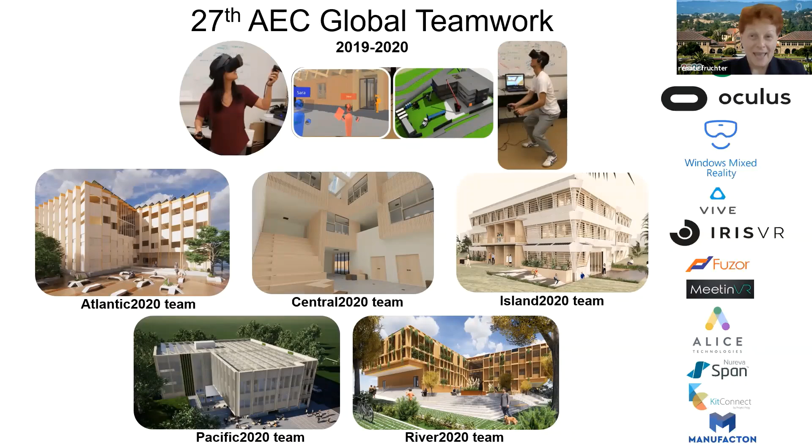And with that, let's move on to the student presentations. All right. Hi, everyone. Welcome to Team Pacific's spring presentation. First of all, we would like to introduce ourselves, starting with our architect, Ada, SEs, me and Dimitris, MEP, Lukash, LCFM, Adrian, and then Mary and Piero as CMs. We would also like to welcome our super owner, Renate, our team owners, Kostas, Ishan, Sebastian, Carolina, and Tobias.

Let's discuss how our team connected over the last 4 months. Starting at Stanford, sitting together around the table, with enormous help from Renate, we formed our team. Less than a week later, we had started to collaborate and navigated the virtual world via Zoom, Discord, and VR. We previously saw working remotely in a globally distributed team as a challenge, but that has become the new normal for us. Especially with the unfortunate situation with COVID-19, which also resulted in Mary returning to India and added one more time zone to our collaboration.

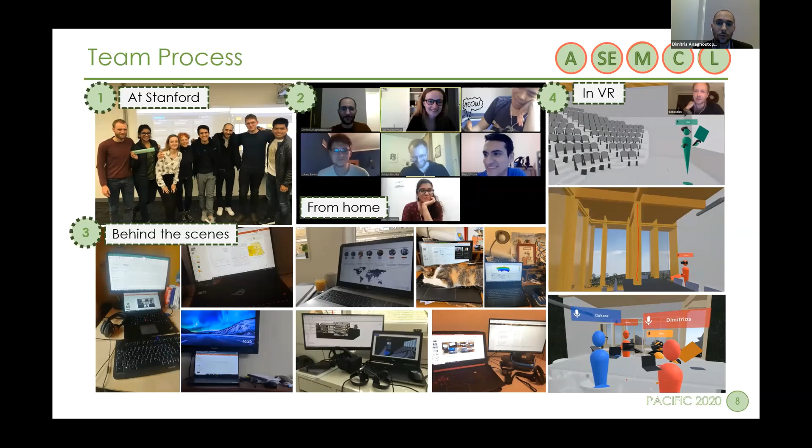Still, we managed to meet often during the week, either in Zoom or Iris VR, to troubleshoot, walk through with the owners, and discuss new ideas. We summarized our interdisciplinary collaboration and discovered that our team's major collaborators are our SEs, who are available to meet and discuss. COVID-19 made our schedules flexible, and at times it just took us 2 minutes to meet on Zoom.

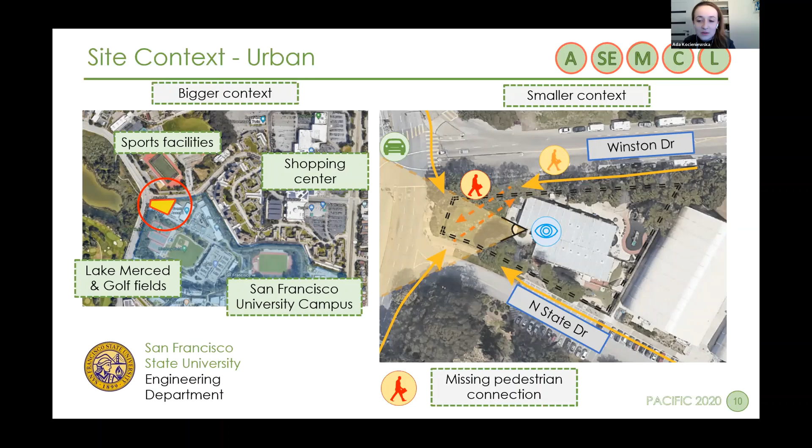Our building is located on a site belonging to San Francisco State University and will accommodate their engineering department. In the larger context, the site is located at the edge of the campus, right next to Lake Merced, which inspired us to take advantage of the lake view while forming our concept. On a smaller scale, our site is situated at the crossroad of the main street. During our site visit in January, we discovered a missing pedestrian connection between Winston Drive and North State Drive.

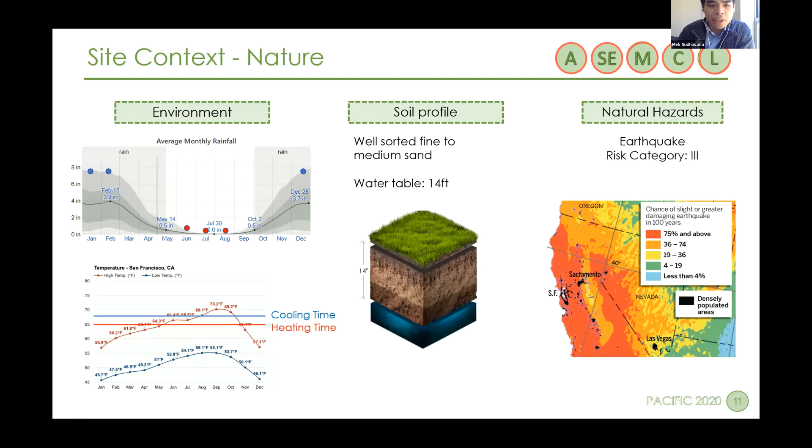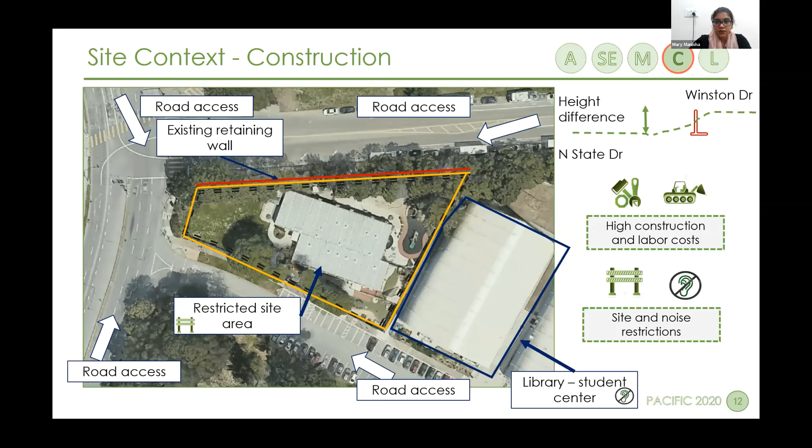The goal of the project is to implement a user-oriented design to connect occupants of the building with the neighborhood community while designing the facility that engages the collaboration between people. The goal is to be flexible and prepared to adjust to the needs of the user. Nature can be interpreted either as a threat that needs mitigation or as an opportunity. Therefore, it is our goal to neutralize any threats posed by nature while taking advantage of what nature has to offer in a sustainable but also innovative manner.

Data is important for design, construction, and operation. It must be shared among all disciplines in order to assure its integrity, accuracy, and consistency. The team must work collaboratively to ensure that the design is ready to be built, operated, and maintained. We've divided the functions to enhance learning, working, and collaboration as the means to create the connections between students and professors, and distribute the functions on 3 floors connected by the heart of the building, which is the Atrium with central staircase.

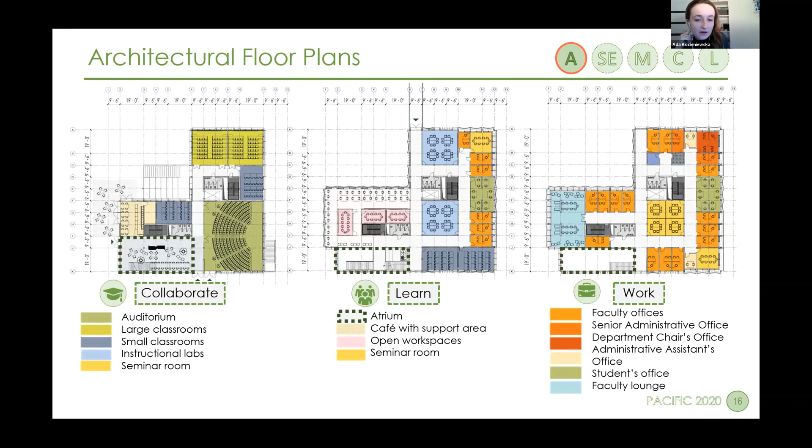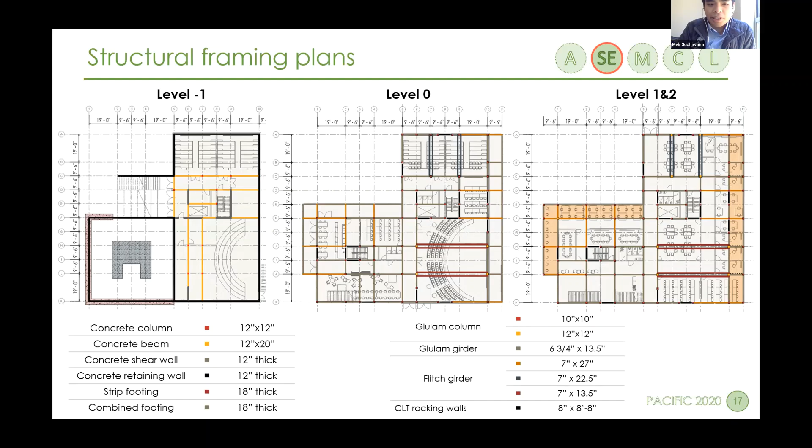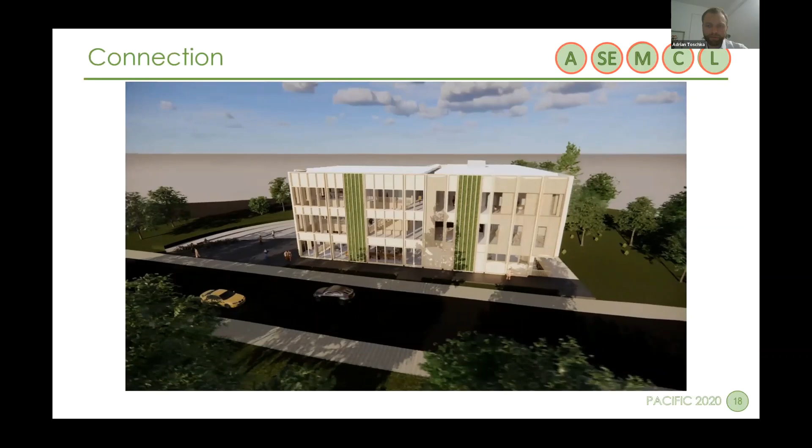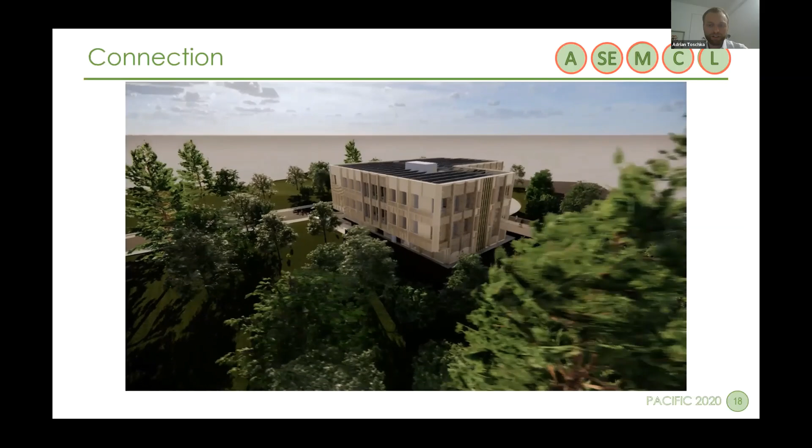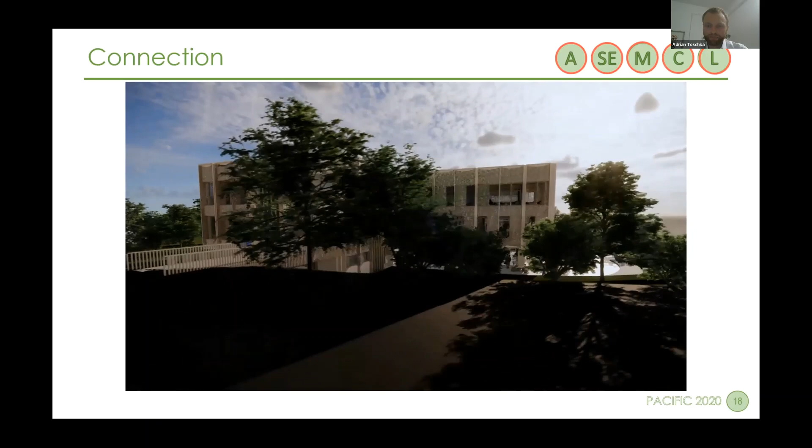Our final design presents an educational building with a user-oriented design that provides innovative facility for the engineering department. The building corresponds to nature with green walls and blends in with the site due to the use of natural resources. The most important aspect of positioning the building was to create a connection between levels of opposite streets. From Winston Drive, we connected the building with the bridge, and from the other side by the open plaza. The focal aspect that creates the form of the building is an integrated wooden facade that is crucial for harvesting water from fog and use it for operating in the building.

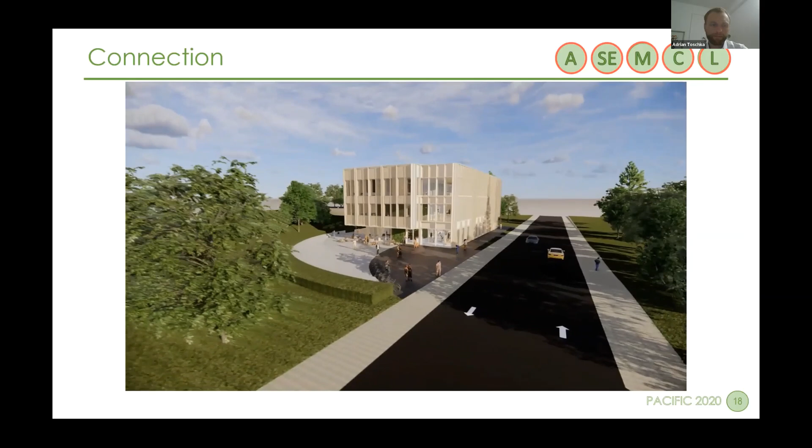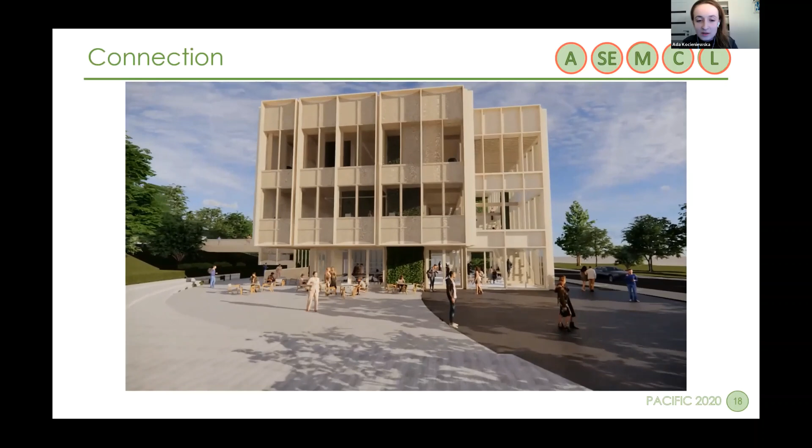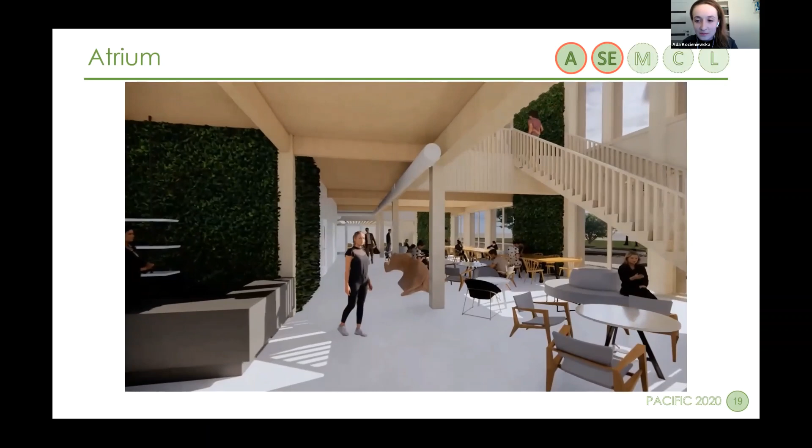The day of the future faculty members starts when they enter the site through the main plaza. It functions as a meeting spot and the main outdoor public space. Right after entering the building, we enter the main meeting and collaboration space, which is the Atrium. It enhances the social connections, but also could be used as informal collaboration space for individuals and teamwork.

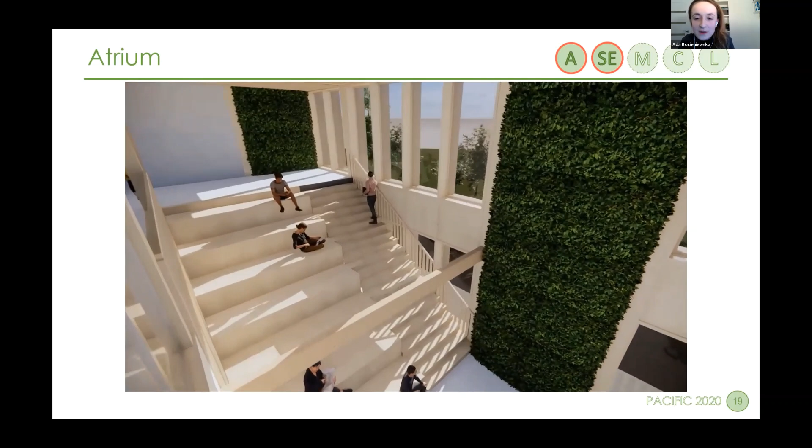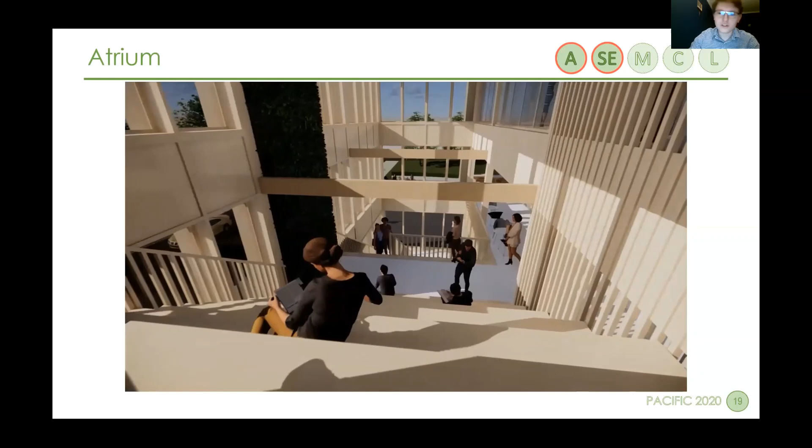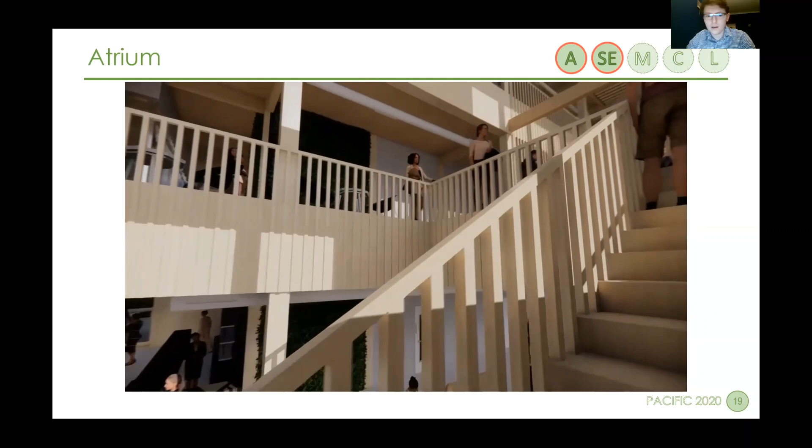The focal point of the Atrium is the staircase that is essential as a viewing spot to the Lake Merced nearby. To emphasize the Atrium from the outside and the view from inside, we've designed the facade to be free from any shading system. To prevent the users from the glare effect and overheating, we improved the windows to low-E double glazing with a low visible light transmittance. The gray tint windows stop part of sunlight from passing through the glazing on the south side.

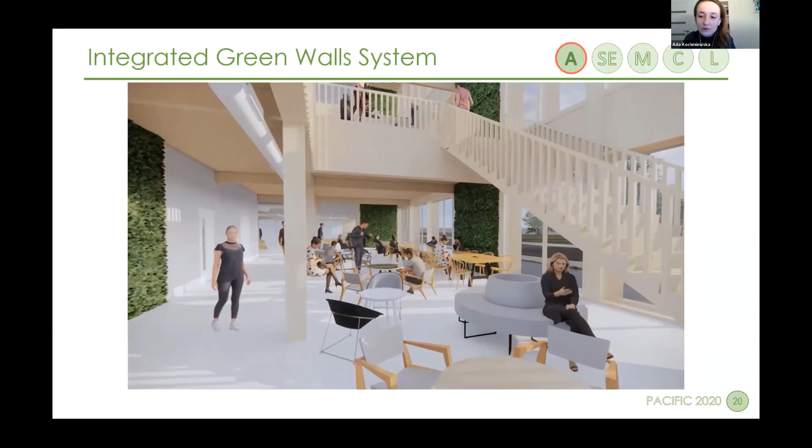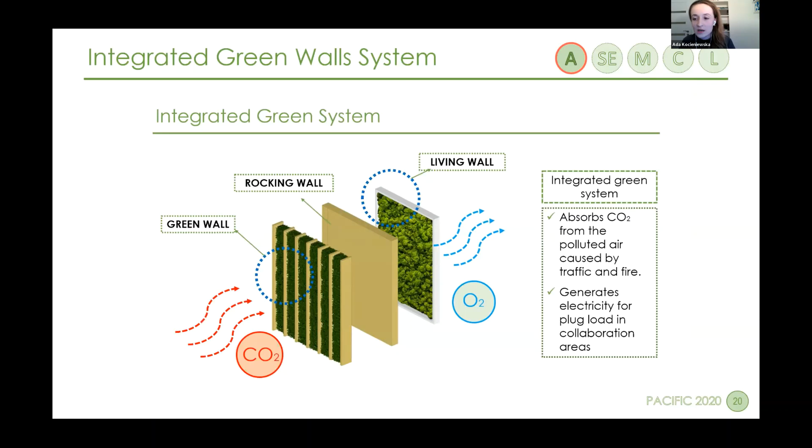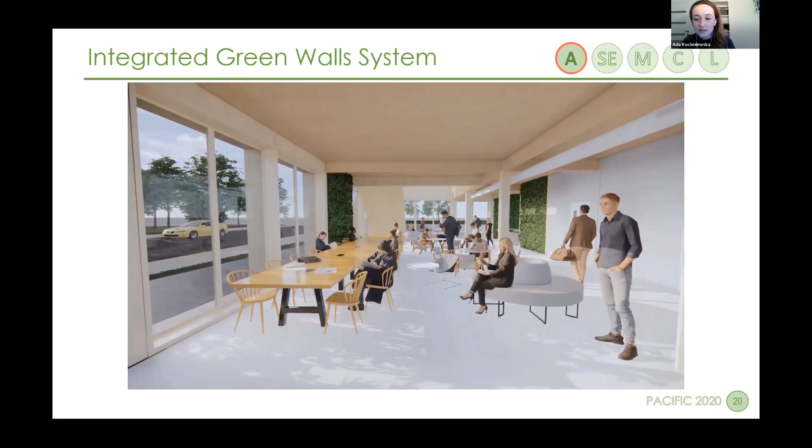The structural rocking walls are part of an integrated green wall system that create the atmosphere of the Atrium and collaboration spaces. From outside, it cleans the polluted air and contributes to decreasing the amount of CO2 in the air. From inside, the system is covered by living walls that generate electricity for plug load in collaboration spaces. Apart from generating electricity, the system creates also pure conditions as well as the natural cooling.

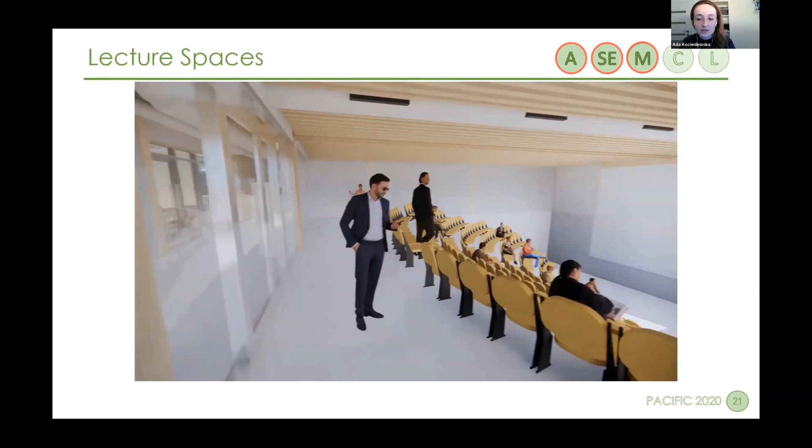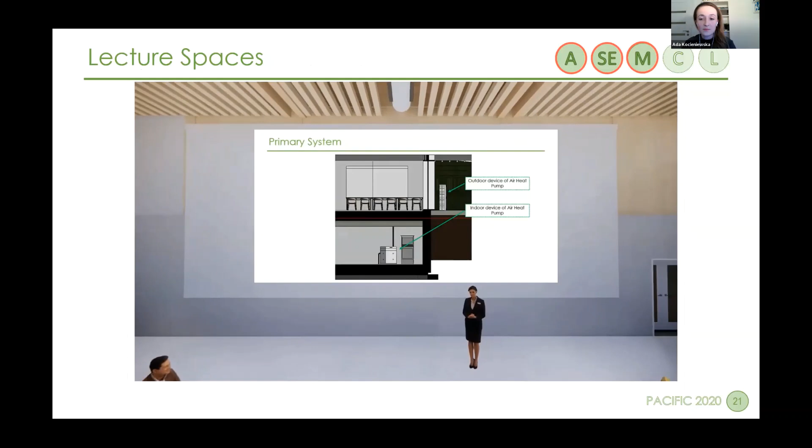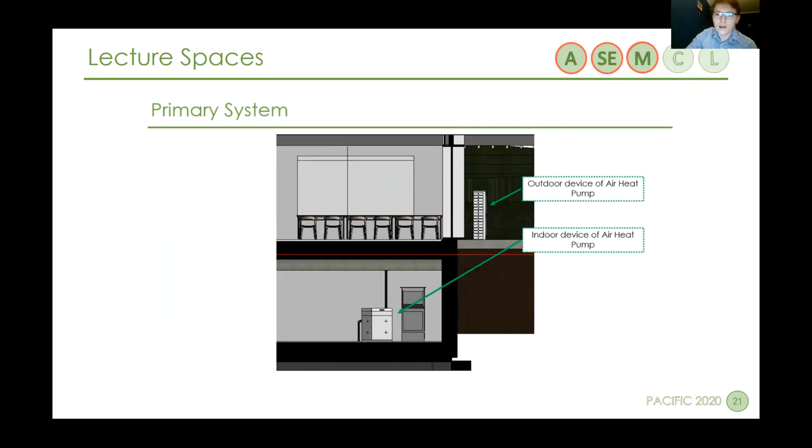The route through the building leads to the auditorium that accommodates lectures and is the biggest room in the building. Additionally, it can be used as a rental space, and the clear visibility is achieved by the terraced audience. To design a building with high efficiency, we also need an efficient MEP system. For the primary system, the reverse air heat pump was chosen because of its ability to efficiently heat and cool the building by only changing the direction of flow inside. It also does not emit any CO2 and has low operating costs because it is powered by our PV panels.

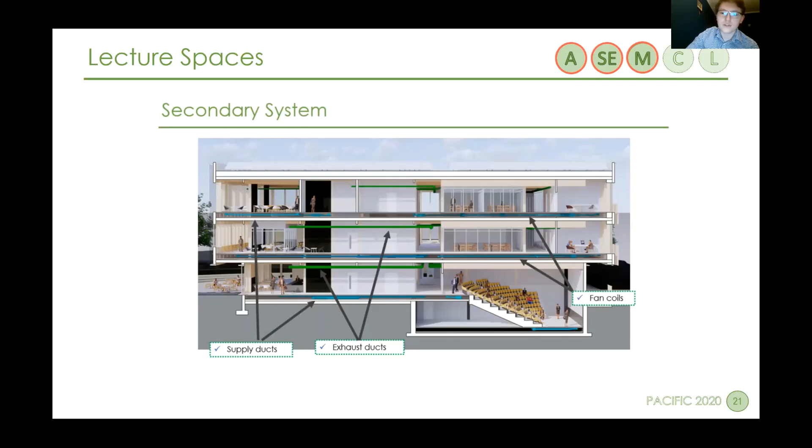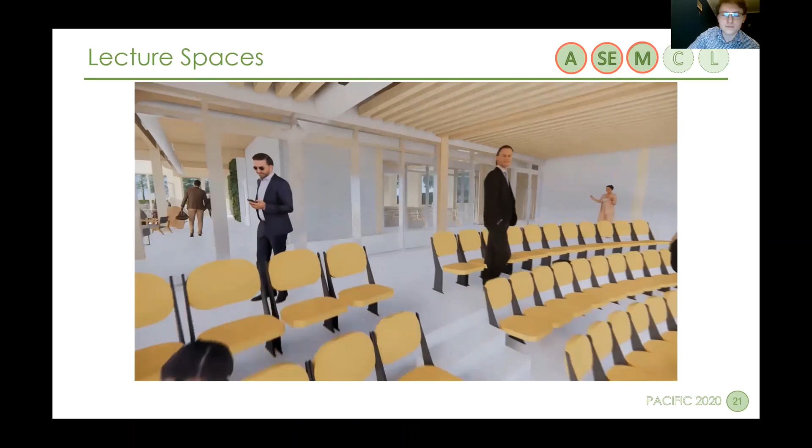For the secondary system, we chose displacement ventilation and central air handling unit with heat recovery. To ensure thermal comfort, we designed fan coils connected by a 4-pipe system. Here in the auditorium, the displacement ventilation is located on 2 levels to improve thermal comfort. The supply ducts and fan coils are located under the raised floor, while exhaust ducts are placed near the ceiling along the beams. Passing by the small classrooms, we reach another space that functions as a lecture space, the large classrooms.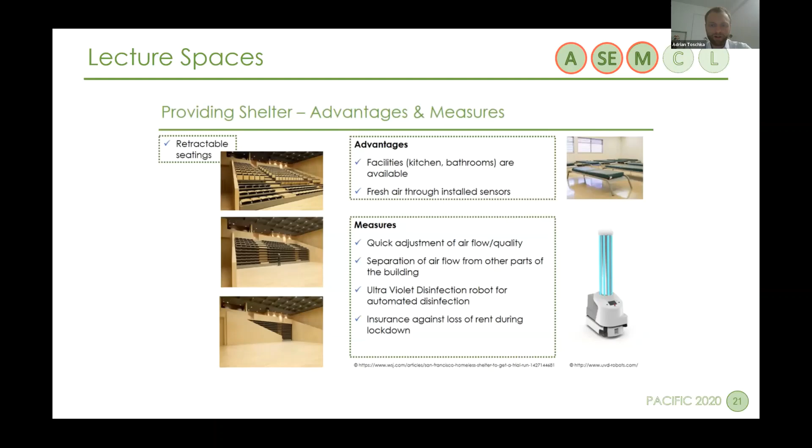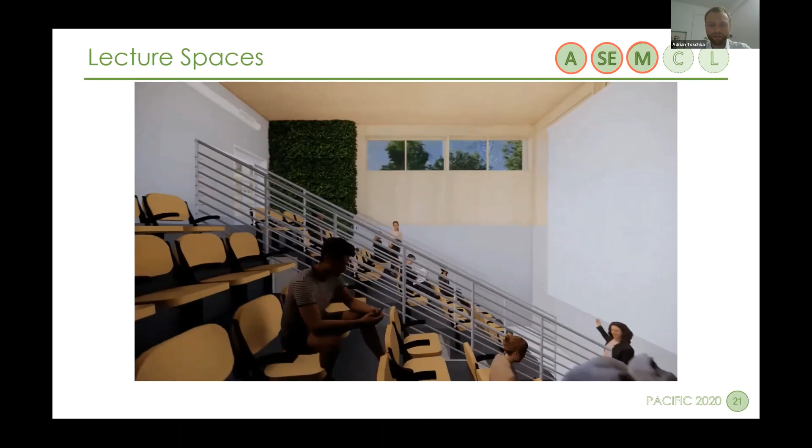other spaces. With the fog catcher and the combination of PV panels and Tesla batteries, we can always provide water and energy. Our ultraviolet disinfection robot, which disinfects the building also in normal waves of influenza, keeps the users healthy. During possible lockdowns, we are insured against the loss of rent.

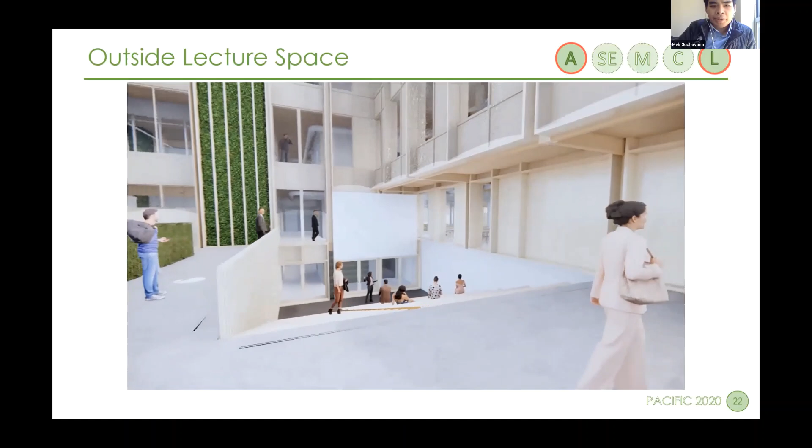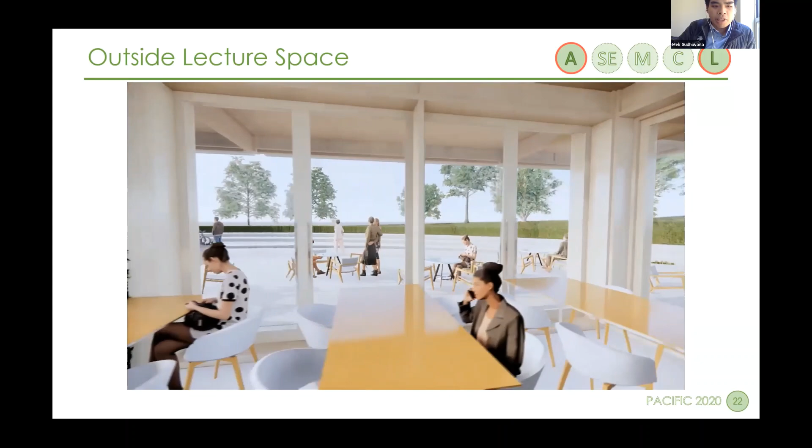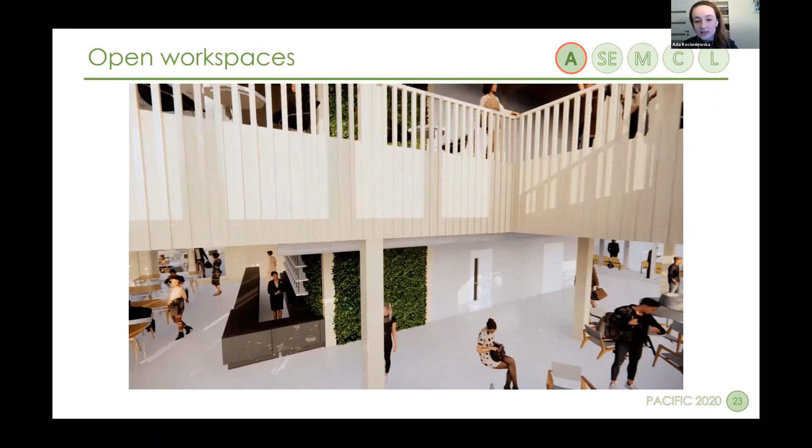The external staircase functions as a lecture area for faculty and a cinema or performance area for neighbors. It is directly connected to the cafe so that during warmer days, it can be opened up to the plaza. It is designed as one of the spaces to create additional income for the building. The building is designed to provide not only educational spaces like classes, but also additional areas for collaboration.

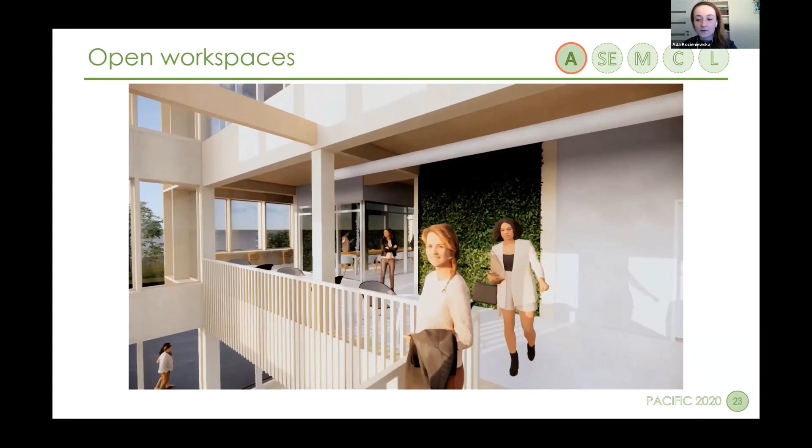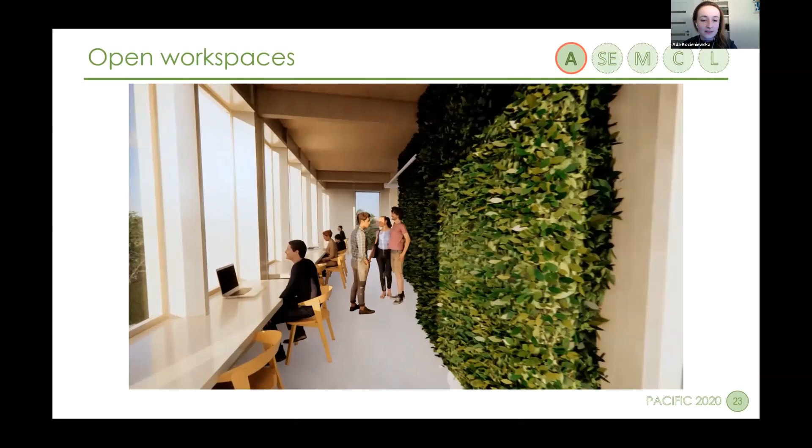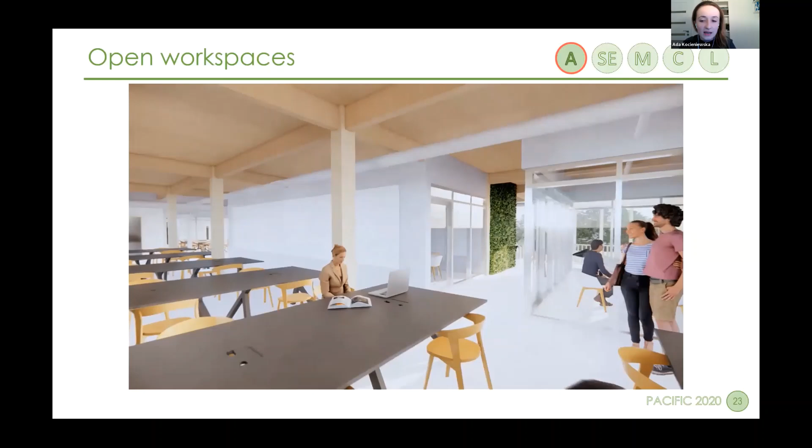Taking the main staircase in the atrium, we reach the first floor where in the western wing, we've situated space fully designated to students' collaboration. It offers multiple options of workspaces, from individual workspaces integrated in the facade through shared team tables to assigned meeting and conference rooms. The communication area is included as activated stand-up brainstorming spots, which we will now use to explain what interdisciplinary challenge we faced in this project.

Due to the fact that water scarcity is a rising problem in California, we have introduced systems that support production of water from one of the most common phenomena in San Francisco, the fog. Our design is enhanced by the fog catchers being integrated with the facade and involved all disciplines to collaborate.

The water is collected on 2 layers of the woven mesh covered by substances that firstly ensure that the small droplets easily slide down to the collecting gutter integrated with the mullion of the facade, and secondly, prevent the mesh from being covered by microorganisms. The irrigation system is attached to the columns of the facade and brings the water through pipes to 2 water collectors located underground on site.

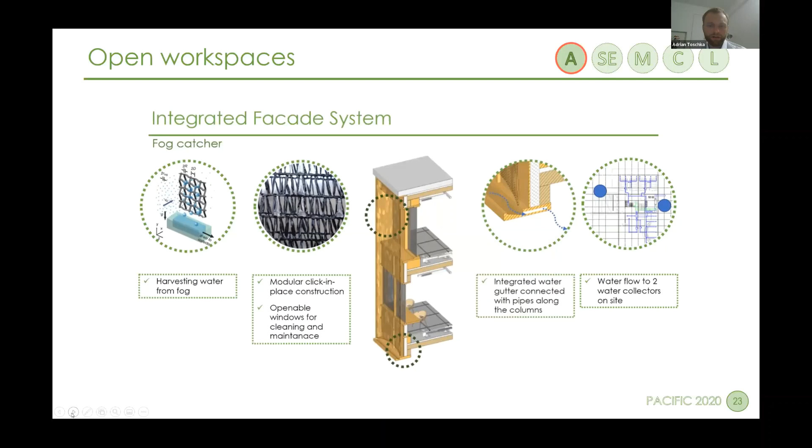Due to maintenance, the fog catcher modules are clicked into the modules of the wooden facade and are mounted with profiles. The windows behind the fog catchers are openable to enable cleaning. The majority of fog catchers are located on the west and north facade because the wind can increase their efficiency. One of the biggest advantages of Karl the Fog is that it occurs almost every day, so our device can work for the whole year.

The adoption of the fog catcher idea, combined with water and gray water collection, allowed us to reduce water consumption by 80%. This system can be used not only for harvesting fog, but also as a shading system. We performed an analysis which showed that the system allowed us to reduce the insolation on the building by 27%, which greatly helps reduce cooling loads.

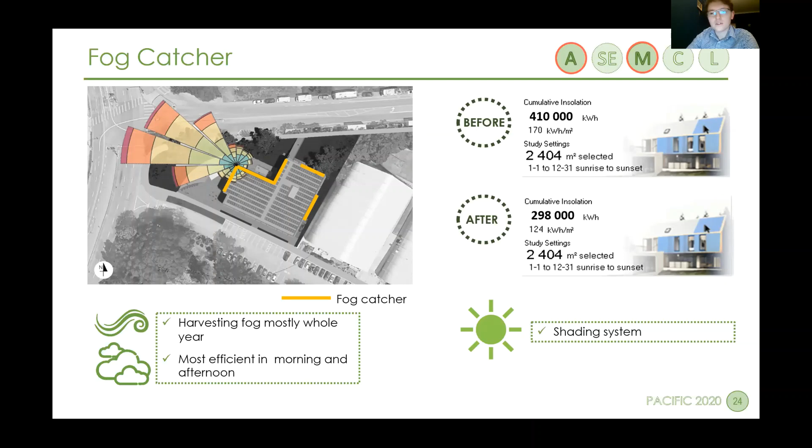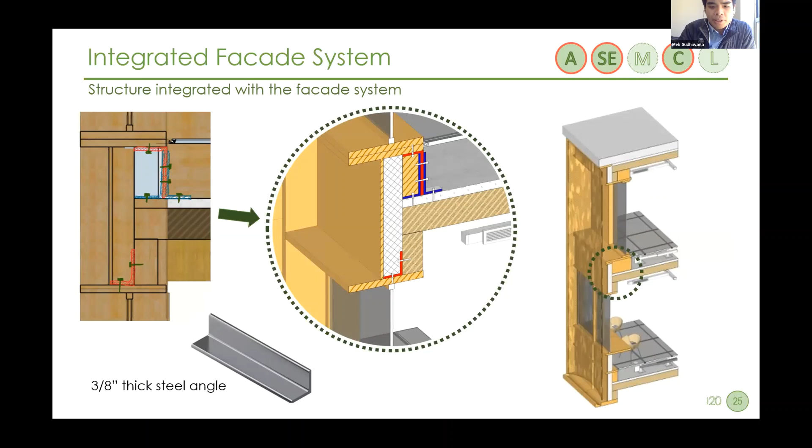Installation of the facade will begin when the structure is finished. First, we install the facade modules with the crane, and then we need to install the facade finish with the telehandler. Finally, the fog catching net is attached and clicked into the facade.

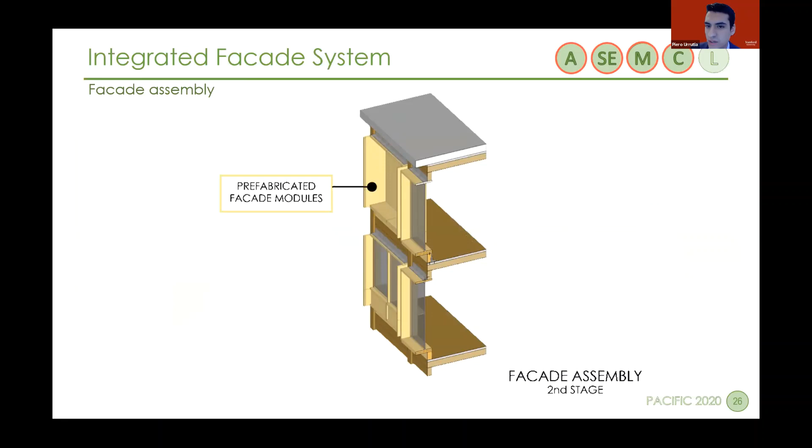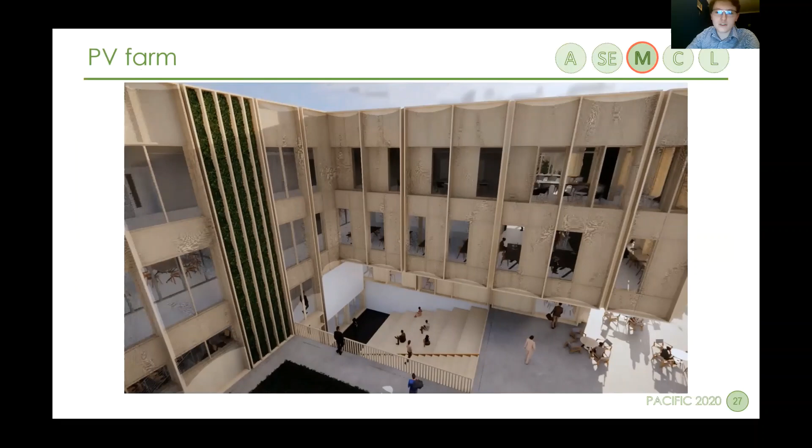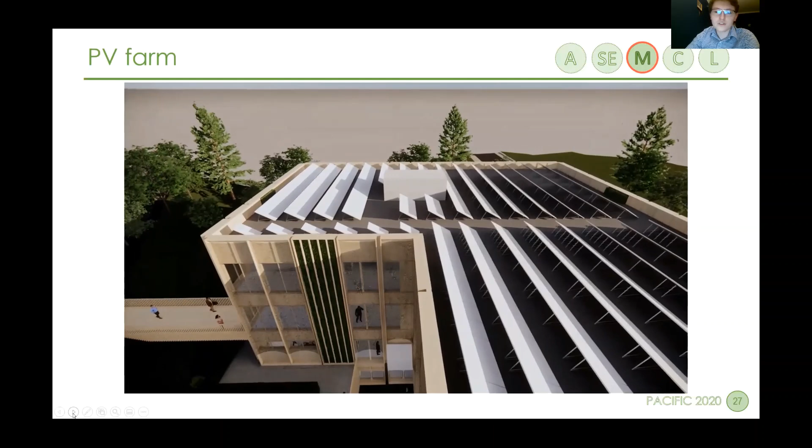Another example of using the natural resources on site is using the sun to generate energy from PV panels. We have 376 high-efficiency panels, which can produce about 32% more energy than we are using in the building. The rest of the energy will be given to the university community to charge electric cars and to the neighborhood in case of a blackout.

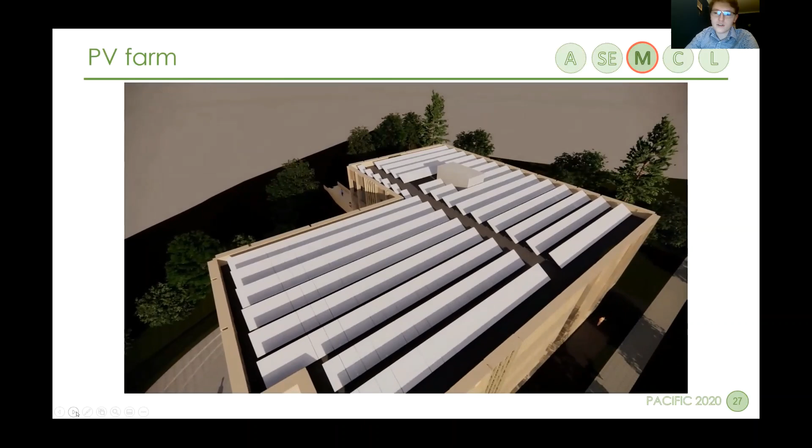We also have Tesla batteries that can store enough energy for about 2 days, which should be enough time to repair the PV panels if they get damaged.

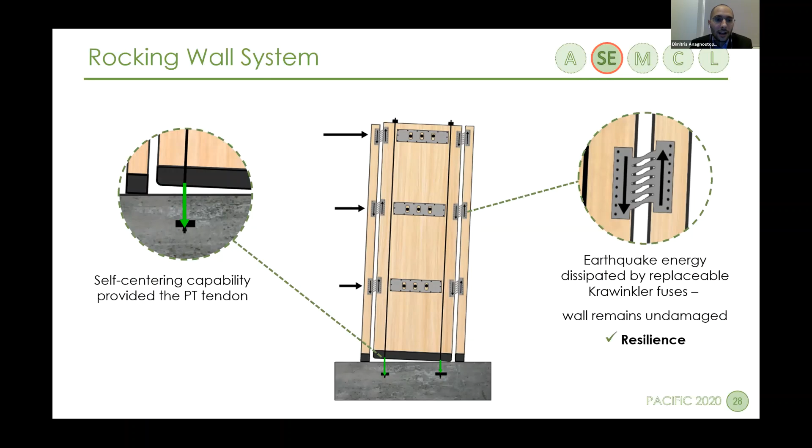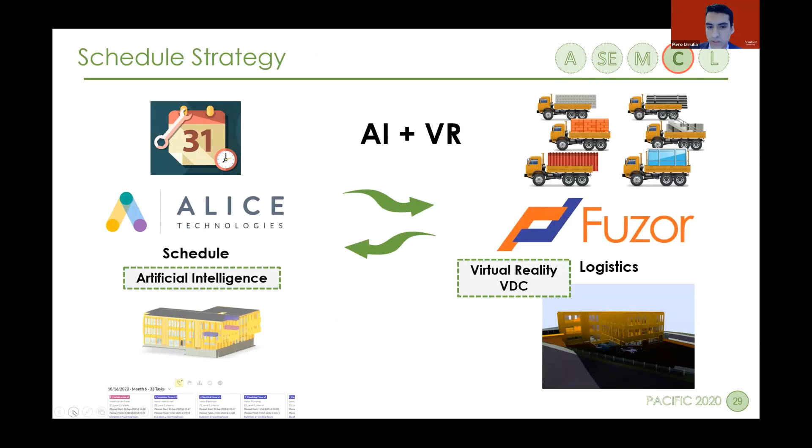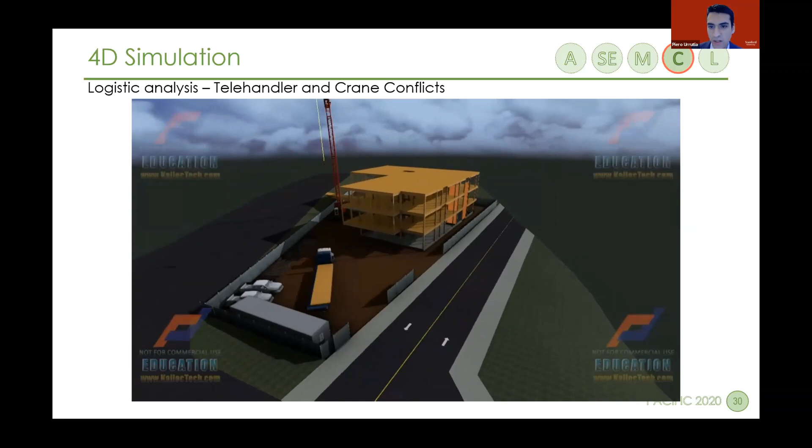With this schedule, we have modeled the 4D simulation, including the logistics. In this simulation, we show how the building is built and what equipment is required at what time. It also shows us if there's any conflict between equipment.

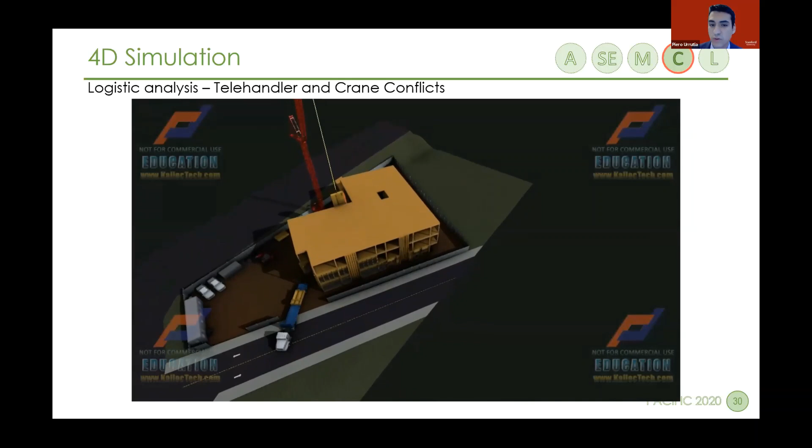The simulation has shown us the feasibility of the installation of the crane and also the maximum length of the truck that can enter the site. The crane is used since the erection of level 0 until the installation of a facade. Trucks come and go delivering materials such as columns, walls, beams, and slabs.

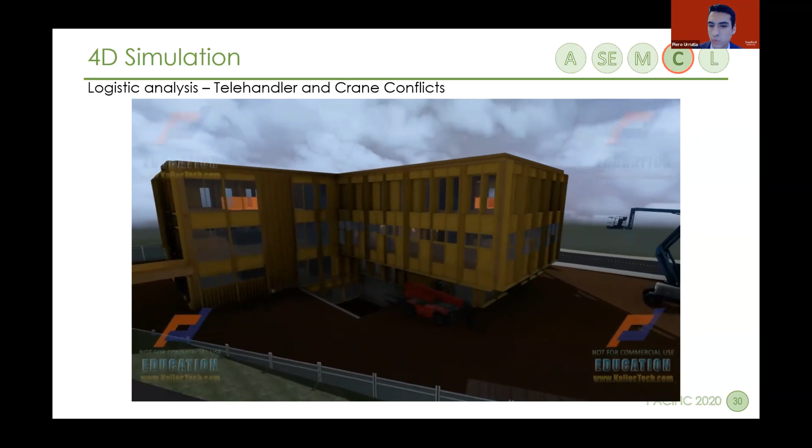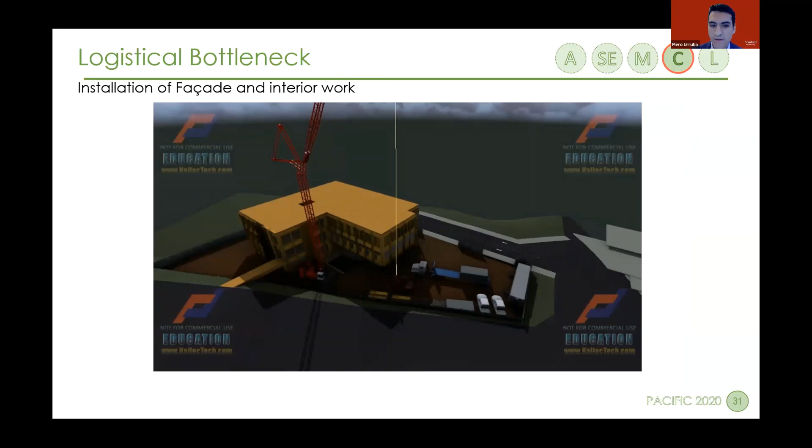With the results of the 4D simulation and ALICE, we have identified the logistical bottleneck. In this simulation, trucks are delivering the facade modules and interior work materials. After the installation of the facade module, there is a facade finish that must be done with the telehandler. This operation must be done at the end of the installation of the whole facade, where the crane is dismantled and carried out of the site. This is to avoid the conflict between the telehandler and the crane. When the truck with interior work material comes, the telehandler must move to another position.

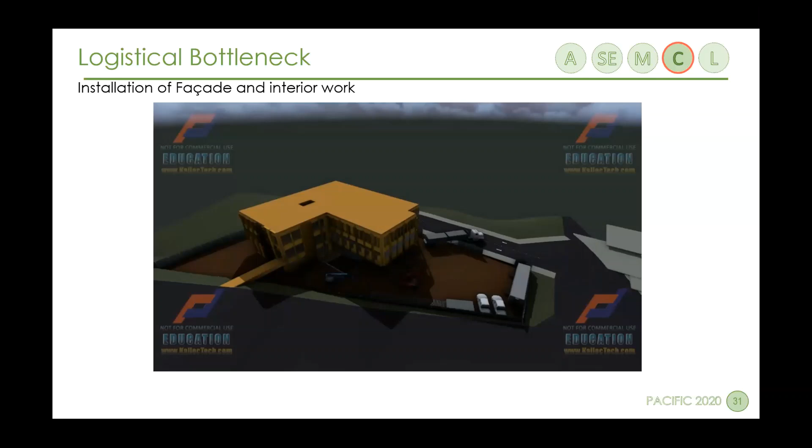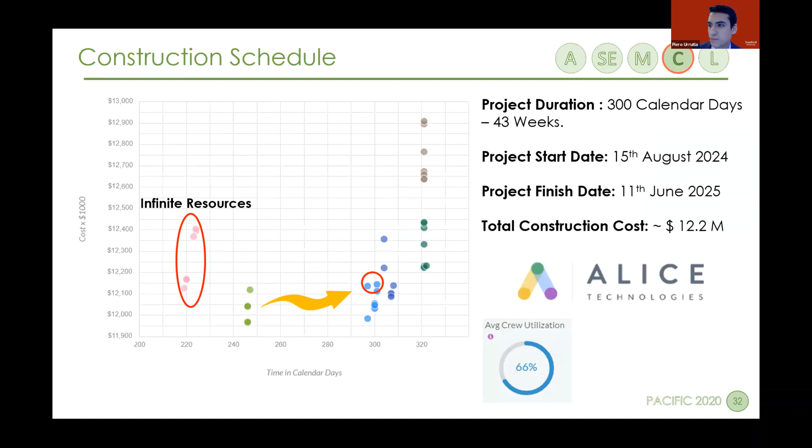We decided to adopt a less aggressive schedule. This will result in a project duration of 300 days and a total construction cost of 12.2 million. For possibilities of prefabrication, the facade module with the fog catcher was a major component, but the risks were high. The structure is made of industrialized glulam beams, columns, and CLT panels, which have been made to standard sizes where possible, leading to optimization of freight. The fire rating risk is mitigated by using fire paint, and the risk of phytocontamination during transportation is mitigated by using a hydraulic boom or pressure wash.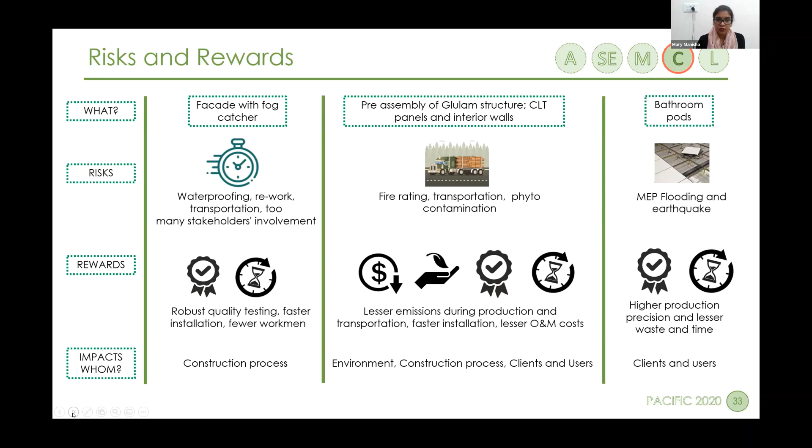We've prepared a summary of the challenges addressed in this year's edition. We are answering the resilience challenge with very multidisciplinary solutions that create a building ready for the unexpected. We are connecting, storing, and sharing natural resources available on site with our users and the surrounding community. We have a timber structure that is resilient against earthquakes thanks to the rocking walls. We are also collecting water from fog and rain to help with the water shortages in California.

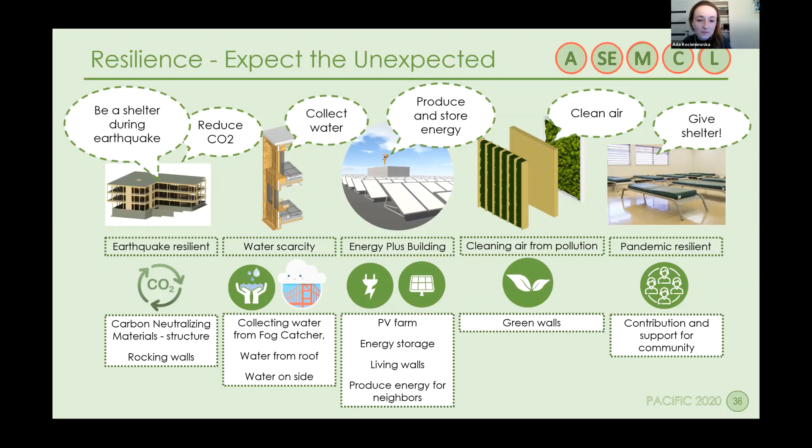After considering the risks and rewards, we decided to install the fog catcher separately and to pre-assemble the facade assembly module whose kit-of-parts include the structure, facade component, and then the fog catcher is clipped. The pre-assembly of the structure will be carried out, which consists of beams, columns, and connections. And this helped us to achieve our industrialization goals: reduction in on-site fatalities and incidents, waste reduction by transport optimization and standardization, 4 weeks of schedule reduction, and time certainty, along with optimization of LCFM costs.

Due to an IPD agreement, we implemented a risk and reward concept regarding the target construction costs from the TVD. The graph shows that we share a reward of $1.2 million with the owners in the financial best case scenario, respectively a risk of $1.2 million in the worst case scenario.

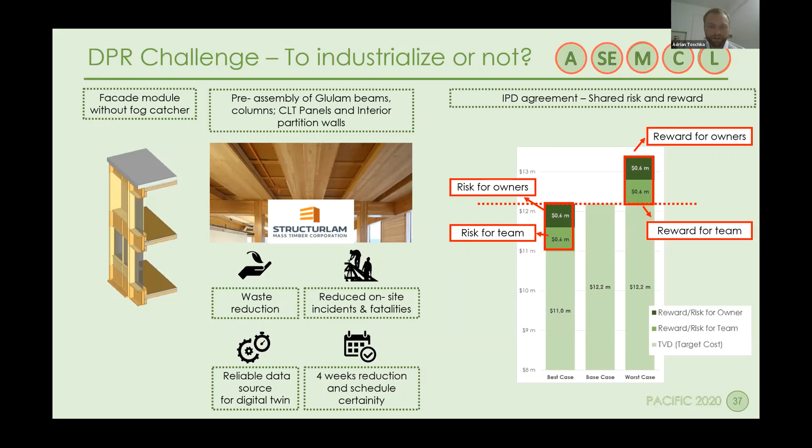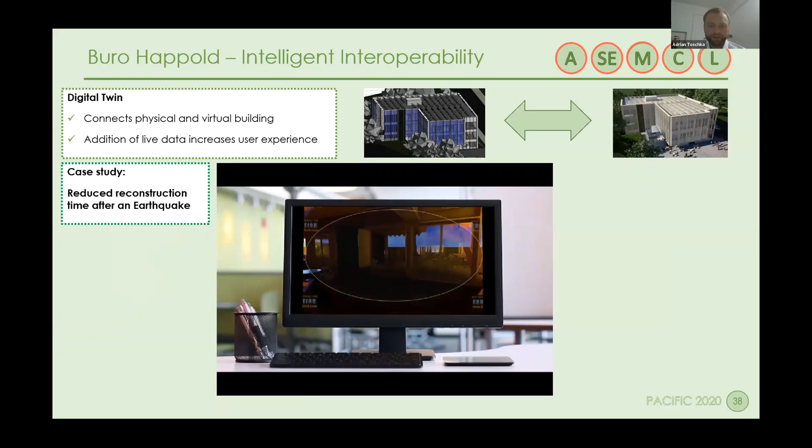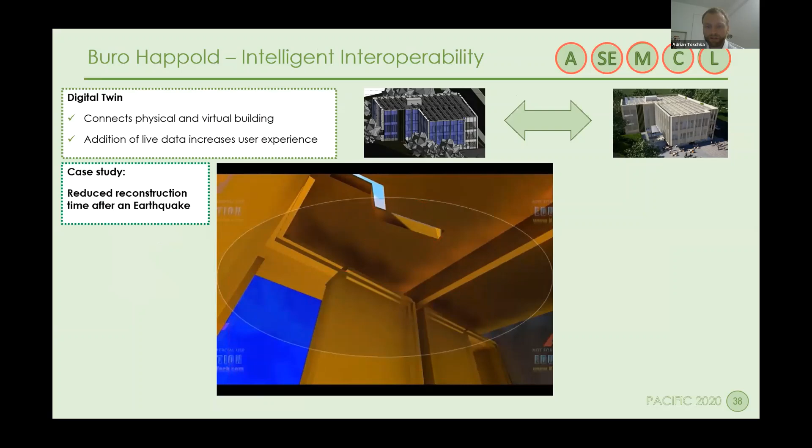To close the loop between AEC, MEP, and LCFM, we elaborated the concept of a digital twin, which combines the virtual model with the physical building. The video shows the benefits of the digital twin during the operation phase in case of an earthquake, combining a virtual and physical walkthrough by using a VR headset and a HoloLens.

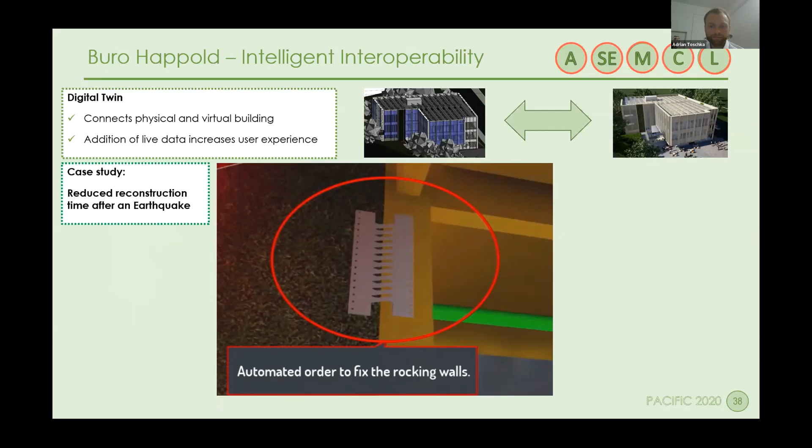We are very proud to say that we are a part of this generation of AEC Global Teamwork. What we've learned here will help us cope with all the challenges coming in our professions. Not only did we polish our skills in our disciplines, but also we broadened our horizons. We created a global project, which wouldn't be possible without any of us. And this learning process couldn't have been complete without enormous help from mentors and owners.